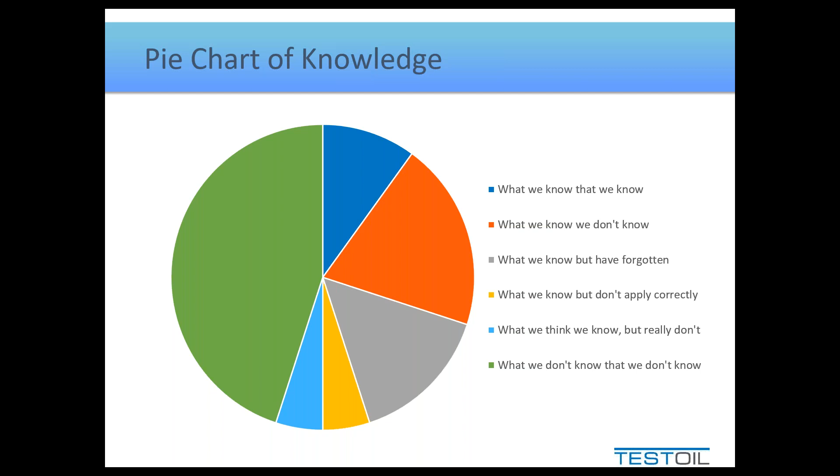So what I thought we'd start with is a little bit about why we use lubricants, then go through a couple of key definitions so we're all on the same page. Then we'll talk about oil films and the Stribeck curve. This is going to become important to us towards the end of the webinar.

And I will present the case study - this overheated gearbox is what we're going to talk about. What we'll then discuss is how we could diagnose at least some of what's going on with the gearbox without any tools - how do we do it without even using oil analysis or vibration or anything like that?

I'll try to wrap up everything people need to know to help read this report. We'll review some common degradation mechanisms, just so we're all on the same page there as well. What I'll then do is describe the tips I have for how to read a report.

And it's a bit unconventional - it's not, like I said, the usual way people typically read reports. And then we'll go through the actual report. So once we do that, you'll see basically a couple things.

One is the unusual way to read reports that's very efficient and helps you get all the information out of it. But two, you will be able to see this common problem of overheating and how even oil analysis can help guide you as to where you should probably focus your efforts.

Once we've done all that, we'll come to some sort of final decision about how we go about repairing or remedying the situation.

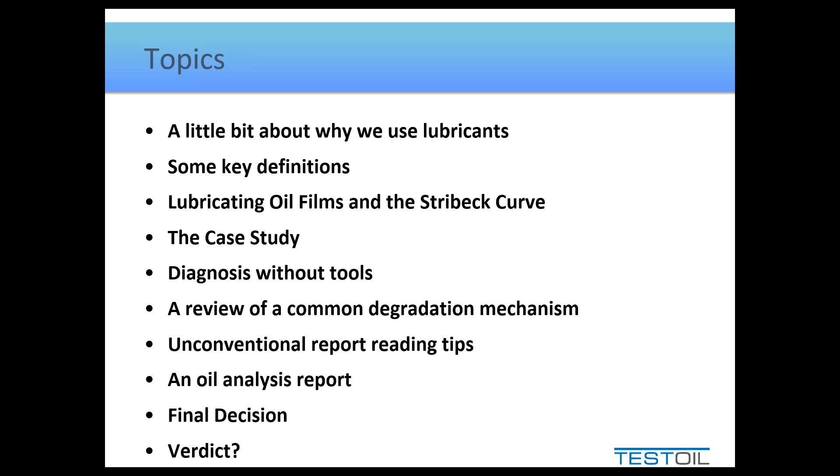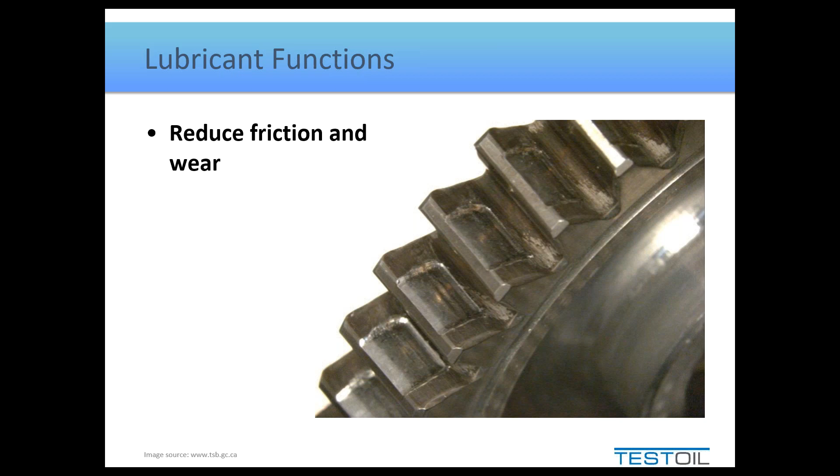So with that, let's start off with a little bit about why we use lubricants. If you ask somebody, why do you use a lubricant, the number one answer you're probably going to get is something along the lines of it reduces friction and wear. That's a great summary statement, but quick definition: what is friction? The shortest possible definition I can give you is that it's a resisting force. Some form of resistance counts as a type of friction.

The point, though, is that friction is not always a bad thing. Anybody who happened to drive today, which I know many of us are staying at home, but if you drove, there would be at least two times you needed friction. One would be the traction to get going in the first place, and the other, of course, would be braking to come to a stop.

That's because just like we need traction to get a vehicle going, and braking to make it come to a stop, with the edges of a ski we are providing a form of friction that gives us control. And that's something I always like to emphasize - we either design in or leave in by design some friction to any lubricated asset. It's because that provides us with control. We don't want things to be absolutely frictionless and move in a way that we maybe can't predict or beyond what we would ask of it.

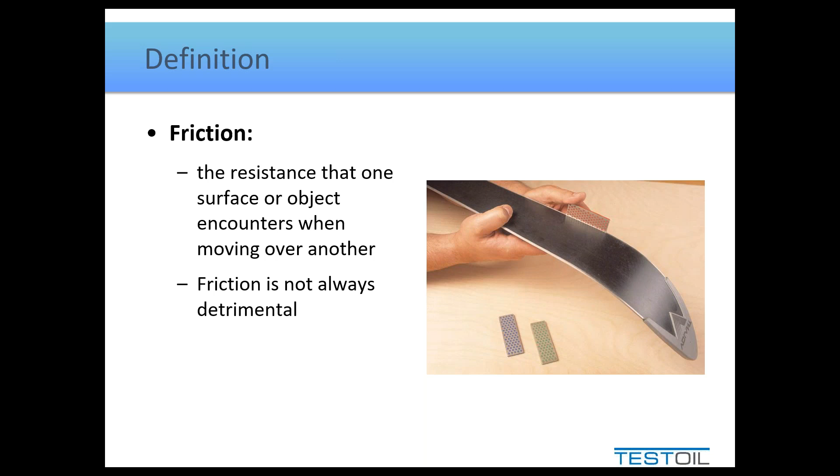Now, when you define friction, often in a textbook, it says there's two types of friction, static and kinetic. Static friction is the friction you must overcome for an object at rest, whereas kinetic friction is the friction we're overcoming while the object is in motion.

In kinetic friction, though, there are three subcategories. Sliding is for anything with a sliding contact, and the best example of that is usually something like a Babbitt bearing, because the shaft turning in the bearing is under constant sliding motion. You can also think of things that reciprocate or oscillate, like perhaps pistons or valves, but a journal bearing is a pretty good example of sliding friction.

Rolling friction is something that would occur just like tires on pavement, but would most often be seen from a lubricated aspect in, of course, rolling element bearings. Most people can picture or think of sliding and rolling friction.

It's the third one I want to emphasize to you: it's fluid friction. As soon as you hear the word fluid, don't think of the word liquid. Just because we say fluid, we don't necessarily mean liquid. What this is, is a resistance to the medium surrounding the moving parts. And if you think about this logically for a second and ask yourself, why don't you fill a gearbox all the way to the top with oil?

Well, if you've ever seen an overfilled gearbox, you would know that usually creates a lot of frothing, and there's generally some issues with the gearbox. But the number one thing is that you've increased the friction. The gearbox will find it harder to spin the gears through oil than through air, because that oil is a form of fluid friction. And that creates heat, and heat creates problems. So we don't want that.

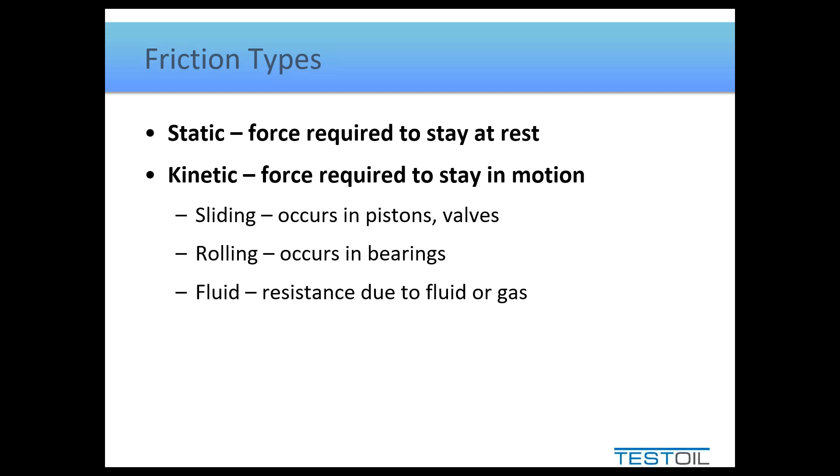Now, to change gears just a little bit here, we need to go into oil films briefly. When we describe an oil film, it's designated as lambda, the Greek letter that represents the specific film thickness. We'll just call it lambda for short. That's the ratio between the mean film thickness and the surface roughness.

Now, for those of you who are a little bit curious, surface roughness is measured not by the mean or the average between peaks and valleys of a rough surface, but by something called the root mean square. So it's the sum of the squares. It's basically an area calculation. It's fun and complicated for those of us who like math.

The mean film thickness is the distance from the surface roughness of one surface to the surface roughness of the other. So think of it simply as this: if lambda calculates to be 1, it means the fluid film thickness is the same as the roughness of the parts, so the peaks of either surface could potentially contact each other. If lambda is greater than 1, there's more fluid film separation than roughness, meaning the parts probably don't touch. And if lambda is less than 1, it means the parts were in constant contact.

So I'm going to use this term lambda and go through just 3 of the main fluid films, just so we're all on the same page, and we all have enough information to know what we're looking at when we read the report.

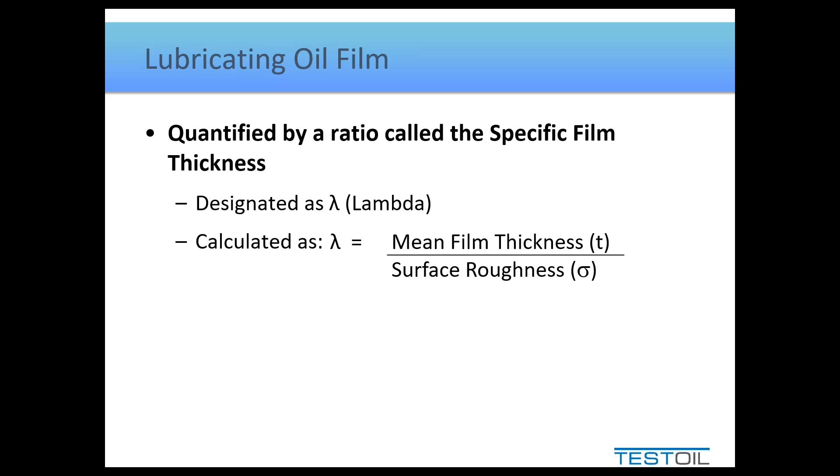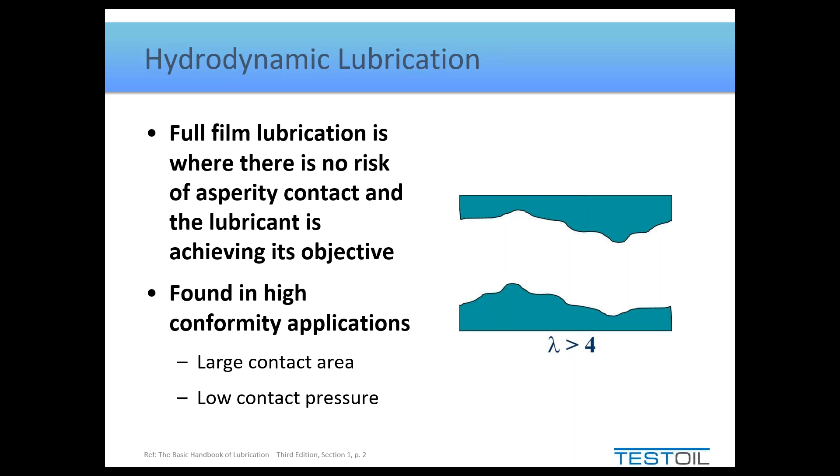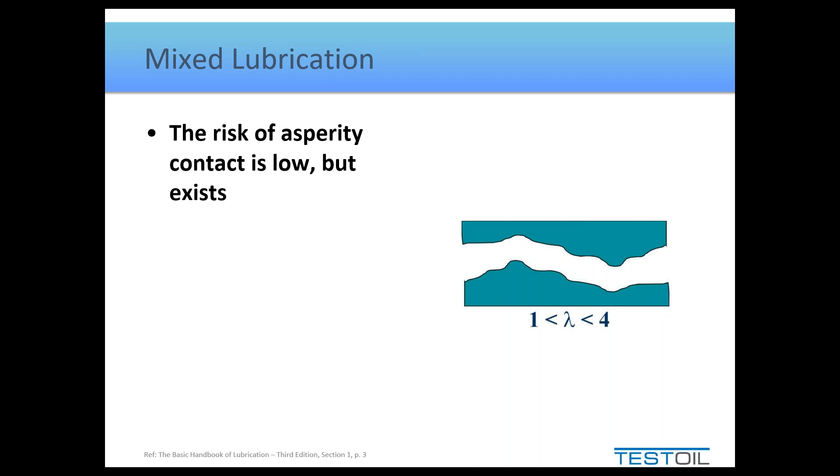On the other hand, if lambda is less than 4, all the way down to but not below 1, we call this mixed lubrication. And mixed lubrication is not a good place to be, that means there's potentially some contact. The last place we want to see is what we call boundary lubrication, which are fluid films less than 1. Less than 1 lambda means you probably have metal-to-metal contact at all times. So this is seen during start and stop, but you do not want this under operation.

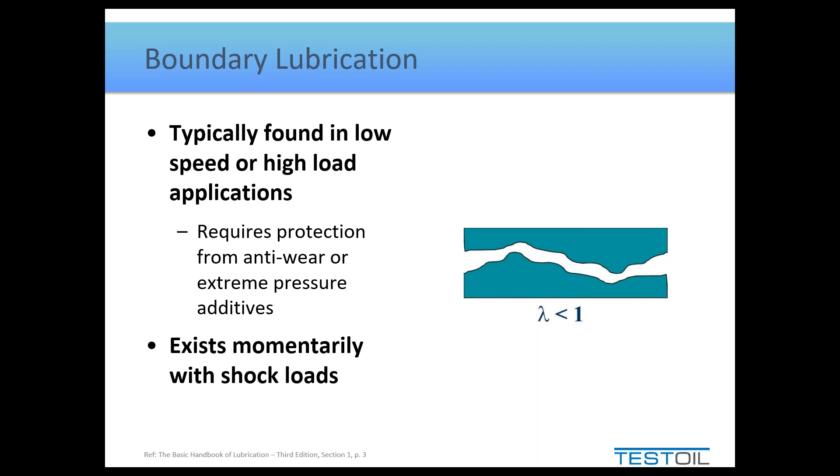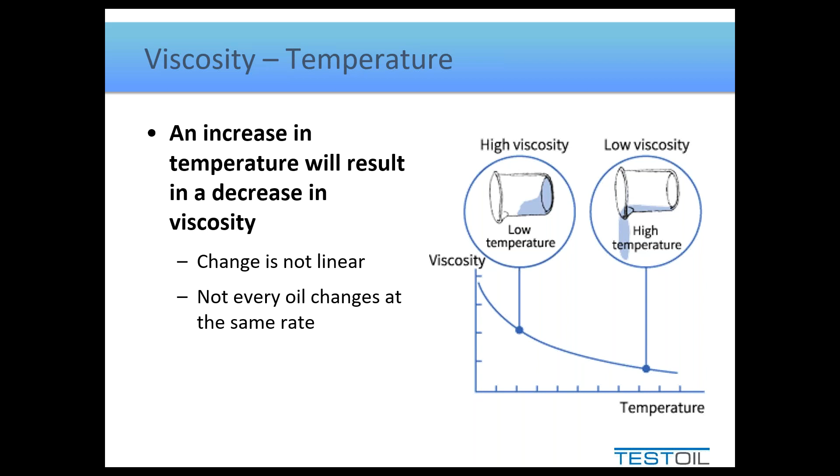That's our first clue. So this is the easy answer. We know it's running hot. What do we look for next? A couple things I like to point out about looking for problems is that sometimes we focus so much on what we see that we ignore what we didn't see. And what we didn't see can sometimes be just as revealing as what we did see.

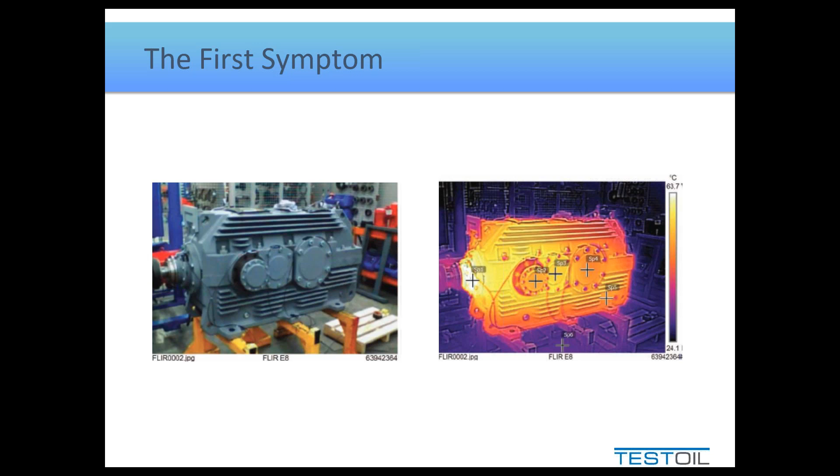And where I'm getting with this, if you want a literary example, is there's a good story from Sherlock Holmes, and it's called The Adventure of Silver Blaze. Now, Silver Blaze is the name of a racehorse. So the problem in the story is the racehorse has gone missing and the trainer has been killed.

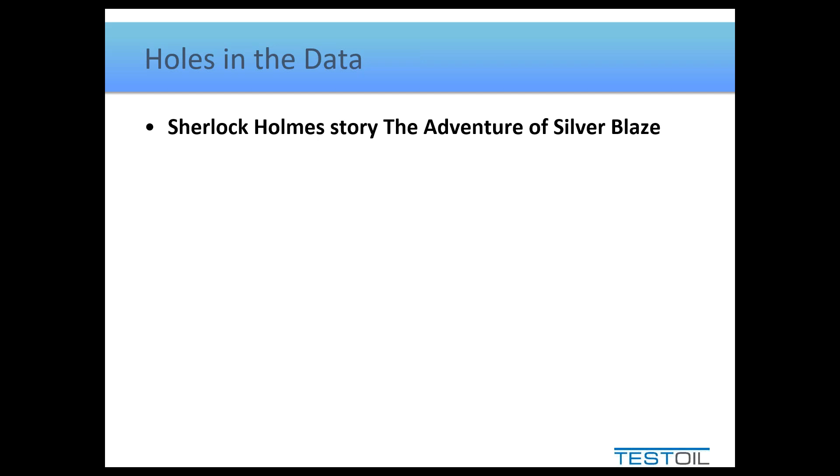So Holmes is tasked with finding this racehorse and identifying the killer. So while Holmes goes and collects his data, he makes note of a few things, and then he has a conversation with the Scotland Yard detective Gregory. And the conversation goes like this.

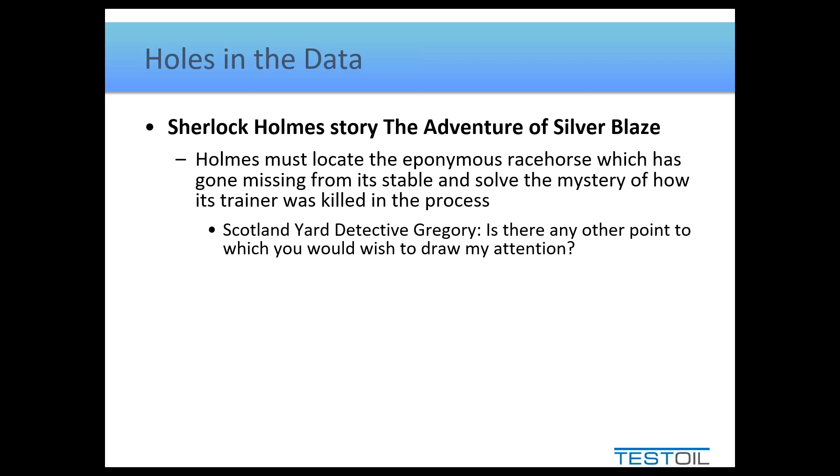He asks of Holmes, 'Is there any other point to which you wish to draw my attention?' And Holmes gives a very classic reply. There's even an entire book written on this sentence here because it's so important for us to understand it. Holmes says, 'To the curious incident of the dog in the nighttime.' Well, Gregory says the dog did nothing in the nighttime. And Holmes replies, 'That was the curious incident.'

Because Holmes's point is that when they were collecting the clues for this kidnapping, as it were, of a horse, and the murder of a trainer, all the witnesses said the dog didn't bark. So what Holmes is realizing is that there's a clue in what didn't happen. And if the dog didn't bark, then whoever stole the horse must have been known by the dog. So basically he's saying it was an inside job.

So that's the kind of interesting thing, is that he knows that it was an inside job, and really the only person who could have done it, funnily enough, was the trainer. And spoiler alert, if you haven't read the story, the trainer was killed by the horse. But the point being, what did we not see, right? We didn't find the trainer's footprint beside the horse's stall, or something that conclusively said it was the trainer. What we realized was something was missing that led us down this path.

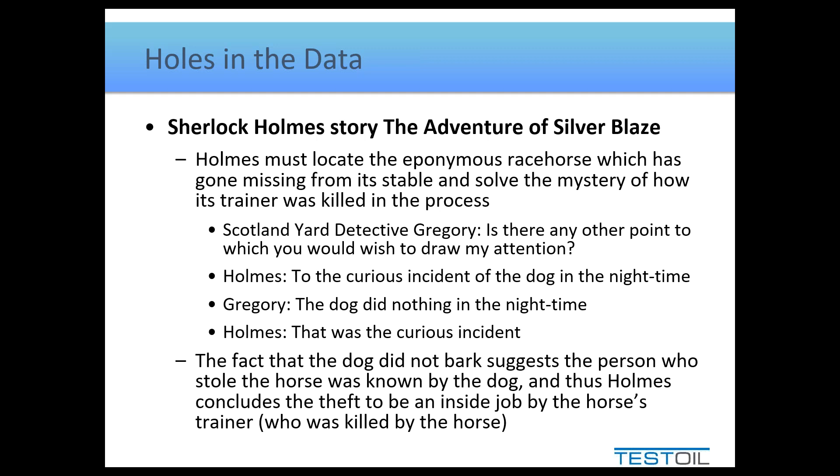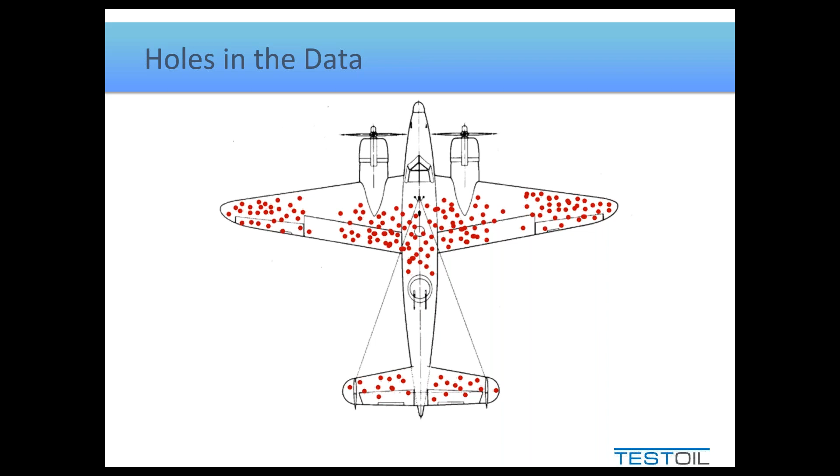So going back to our gearbox case study, we've got an overheated gearbox. We already know it's hot, we need to go figure out something else. And I said I'd show you how to do this without tools. So what we're going to use are the 5 senses. So if we walk out to a hot gearbox, what might we see?

Well, the obvious thing we're probably looking for is the oil level being too low. That would be a pretty good thing to look for. Now funnily enough, as I said at the beginning, in terms of fluid friction, it could just be that the oil level is too high. But more times than not, we're probably seeing that the oil level is just right.

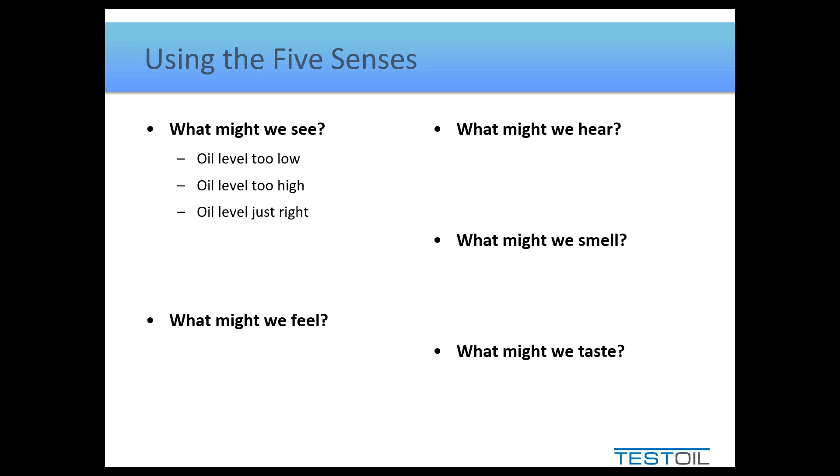What we would also see as a secondary effect to this overheated temperature is the oil has actually gotten darker. And if we're fortunate and we have one of these, we could check for debris on a magnetic plug. These would be things we could see with our eyes to diagnose what's going on with the gearbox.

On the other hand, we also have our hands. So what might we feel? Well, heat's the given, right? We already know that one. But something could be causing that heat, and one of the easiest answers would be maybe it's a misalignment, maybe it's an imbalance. So we might actually feel with our hands some form of vibration.

Now, typically coupled with this, we should hear some noise. If it's really out of alignment or really out of balance, it's probably causing metal wear, and we should at least hear some type of noise. So that's now using our ears. If the oil is really hot, then it probably is burning, and therefore it should smell burnt. So that's our 4th sense.

The 5th one, I threw this in here as a joke. No, we don't want to go down this path. Please don't be tasting oil. That's an HSE violation, so don't use all 5 senses. But these are the kind of things that we'd be looking for.

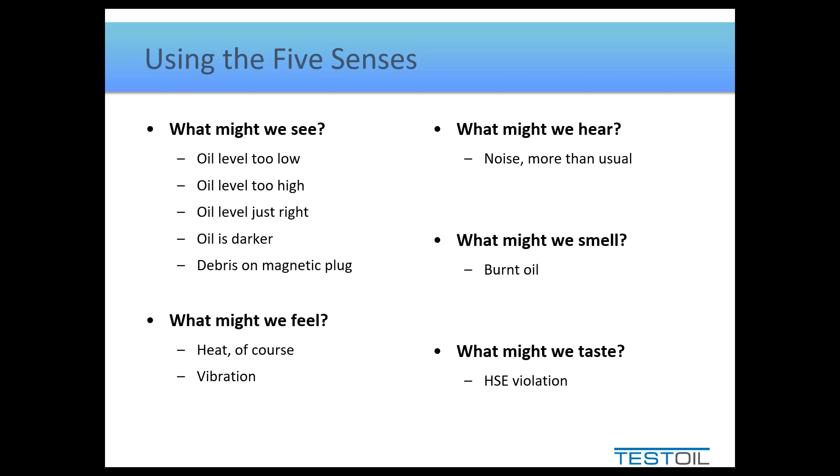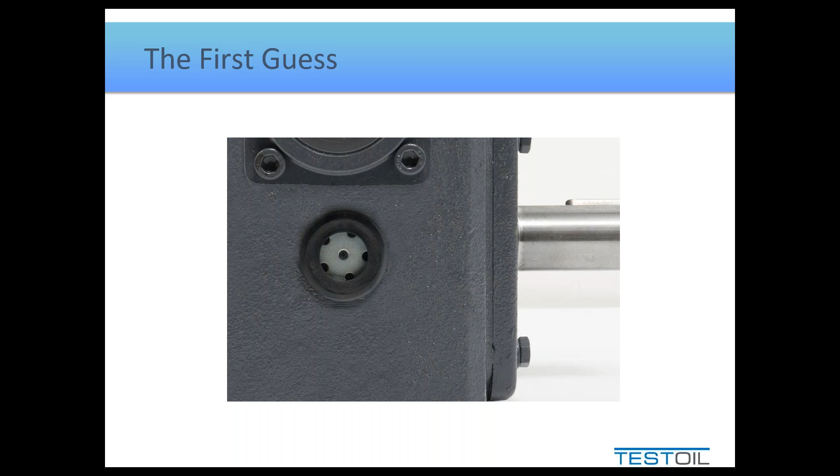Now, in our case study, this was done. And what they're expecting in the hot gearbox was to go up and see the sight glass with either a low level or, like the picture here, no oil visible in the sight glass. But as it turns out, that was not correct. That was not the issue.

Another thing they were looking for was that it should potentially be creating a lot of noise. And again, that was not what was found. This was not noisy. So we're eliminating things, and in the list of eliminations, we also thought we might feel some vibration, and we did not feel vibration either.

This is why I told you the Sherlock Holmes story and the airplane armoring story. If you go back to our Stribeck curve and say, I don't see that the level's too low, I don't feel vibration, and I don't hear any noise, those three clues are not present. So by knowing what you didn't see, you can eliminate being anywhere on the left side of the Stribeck curve, anything to the left of 4, because all of those would account for the symptoms. But since we're lacking those, we know we must be on the right side, somewhere to the right of 4.

So if we've got heat, but we're on the right side of the Stribeck curve, what does that tell us? It tells us our lambda value is probably too high. So now we need to figure out why we think that's happening.

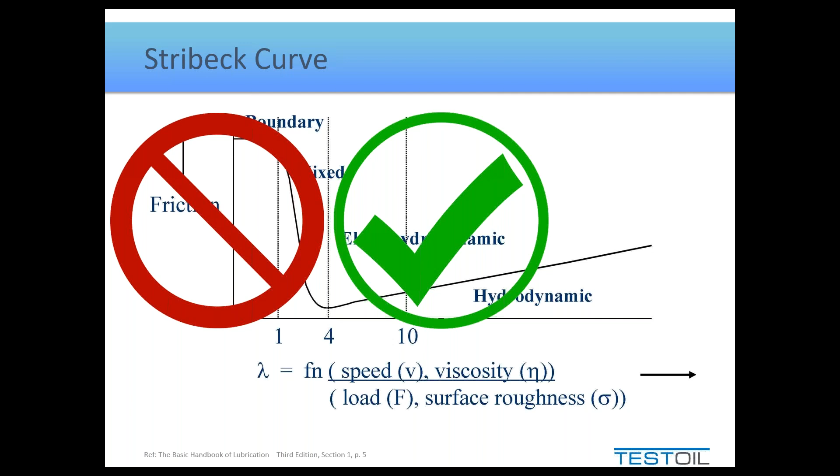As our last bit of review before I get into how to read a report and show you the report, I said I'd talk about oxidative degradation and the mechanisms behind it.

Most commonly when oil oxidizes, it's because it's come into contact with oxygen, which is fair since that's the atmosphere. What accelerates the degradation, though, is generally heat. That's the big one, but it can also be accelerated by water contamination. And certainly if there's any metal content in there, it can act as a catalyst. Other contaminants like dirt may play a minor role, and entrained air introduces more oxygen.

The outcome of degraded oil is that, number one, it's probably darker, and it can also have other things that maybe you can't see but help impart some of that color. Those are listed over there.

In quick summary, the most common things to see if the oil has actually degraded would be: visually, it would be darker in color; through analysis, the acid number has climbed; the viscosity has probably also increased a little bit; if you're measuring insolubles, those would probably increase; and your nose might detect that the oil has either gone rancid or developed a foul odor.

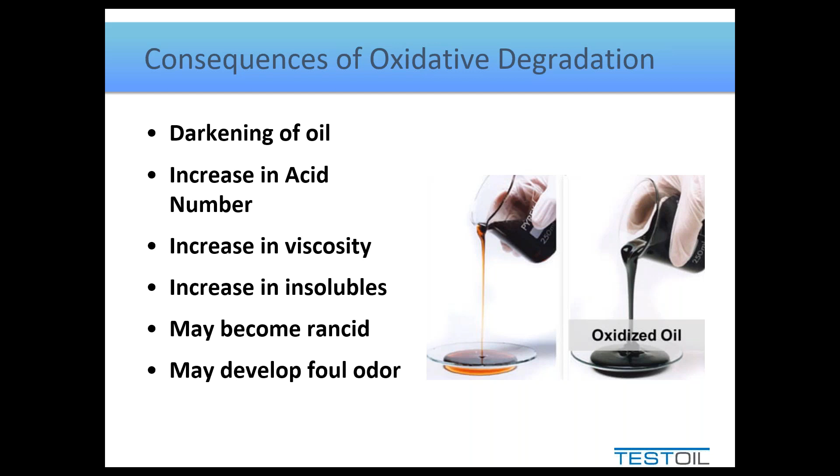When this happens, people are always looking for why it happened, and the most common cause for degradation is temperature.

If you haven't heard this before, there's a chemist named Arrhenius, who discovered that every reaction in nature—not unique to lubricants, it's everything—doubles with every 10 degrees Celsius, 18 degrees Fahrenheit rise in temperature. Meaning if you take a bulk oil temperature from something like 70 degrees Celsius, 160 degrees Fahrenheit, and increase it to 80 degrees Celsius or 180 degrees Fahrenheit, the rate of reaction has now doubled.

So it is producing degradation byproducts at twice the rate. The acid number goes up twice as fast, viscosity changes twice as fast, so on and so forth. That's the number one cause as to why degradation occurs and occurs quickly.

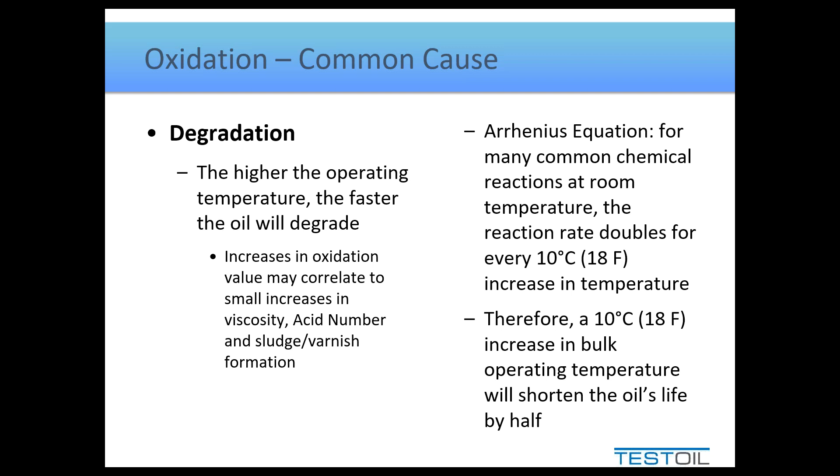Another pointer here is that when we have moderately high temperatures, you'll see your oxidation values on a report increase by themselves. But if you get to extraordinarily high temperatures—what I like to call high temperatures—you also get nitration coupled with the oxidation. That's a little tip I use to help identify the severity of a problem.

I expect oxidation, and I know oxidation will be driven higher the higher the bulk operating temperature is. But if I can get nitration to occur simultaneously in a non-combustion application, that's very worrisome to me because it means I've reached some extraordinarily high temperatures. There's definitely a hot spot somewhere in the system when you see nitration.

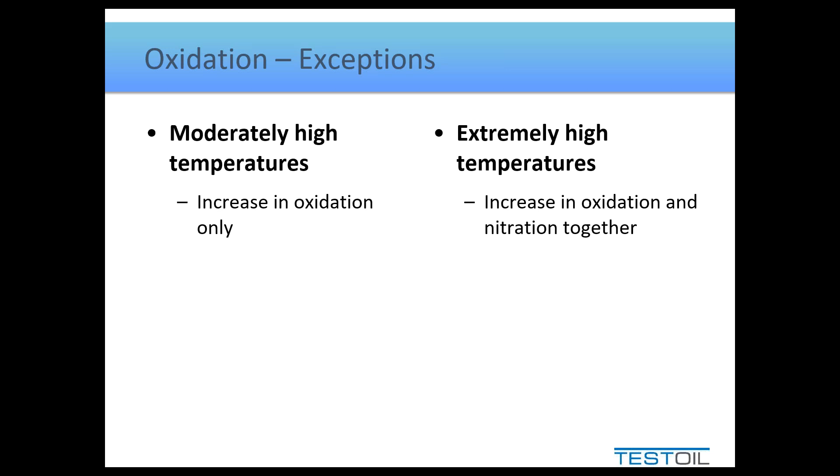One of the pitfalls when it comes to interpreting oxidation is not everyone knows what it looks like. There's a key thing about the visual nature of oxidation: it's typically very, very dark, dark brown to black in color. But it's also gritty and granular, because it forms crystalline and abrasive particles. This is key to understanding what we're going to see.

Now that we've gone through all that, let's take a look at the steps it takes to read a report. The first step is an easy step.

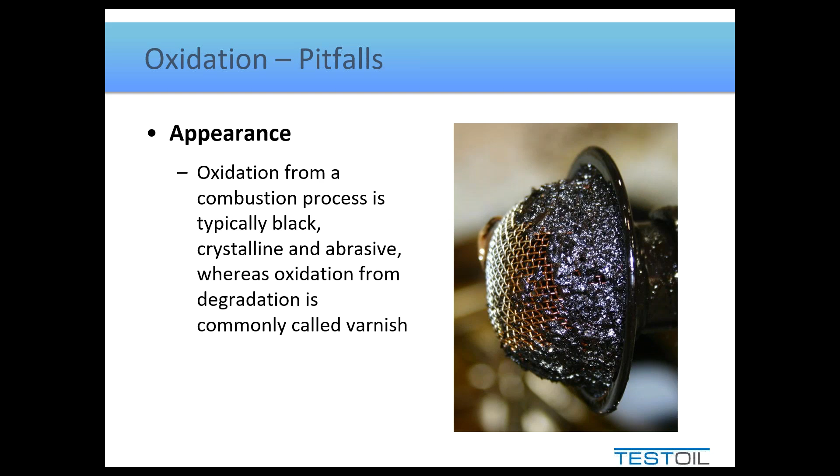When you read a report, read the whole report, top to bottom. Be methodical, don't skip around, don't go to the highlighted values only, don't just read the comments. Start at the very top and read your whole way down the report. You're gonna learn things as you read the report, guidance as to maybe what correlates or doesn't correlate with some of the other data.

Once you get to the actual numerical data, here's what we're going to do. We're going to decide if we think the value is abnormal, if it seems amiss in any way, off trend, too high, too low, not what we expect based on new oil, whatever it might be. As we decide it's abnormal, we must classify it as either a cause or an effect. We don't have to decide what causes have which effects or which effect was driven by which cause, just assign it a cause or effect.

Did this occur because of something else? Is it the primary reason something's going wrong? Once we do this, we should be able to group all the causes together in one or maybe two groups. Everything else will just be an effect and we don't have to worry about those. We focus on the causes and we can then decide on the next course of action, something that should help us fix the true root cause of the problem.

And that's why I say changing the fluid is not really the best idea. Changing the fluid makes the next oil analysis report look great, but doesn't necessarily fix anything mechanical. Very seldom is it the fluid's fault something's gone wrong. I mean, there are times where, yes, maybe it's too contaminated or whatever to continue using, but changing the oil doesn't prevent further contamination.

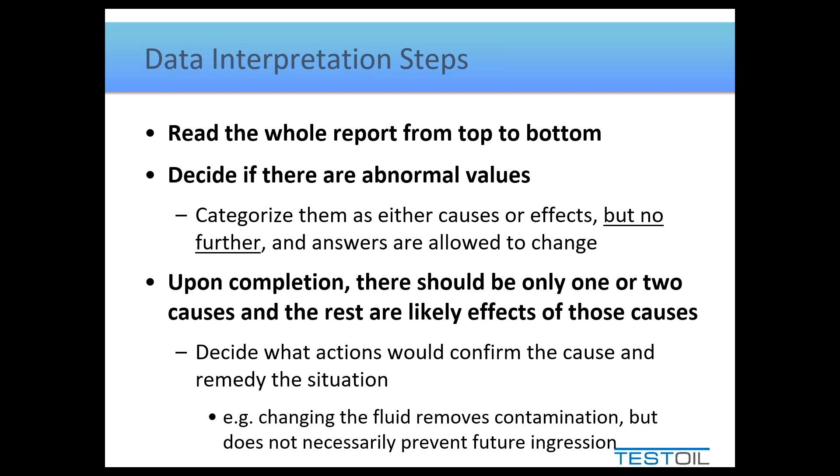So with that, we will get into the actual report now. For those of you not familiar with a TestOil report, before we get too far into this in terms of reading it methodically, let me just point out a couple of formatting things here.

Once we get down to the numerical data, I will be referring to the columns here. The first column is the new oil column, as you can see identified at the top there. That is data from a sample of virgin unused oil submitted by the end user to the lab. This is not populated by information from refineries or anything like that, it's actual samples of the oil taken right from drums, totes, however people get their oil, and submitted as a comparison. The next column over is the most current result.

As you move further and further to the right, the results get older and older. So when you're looking for trends, you read from the right to the left. When you're reading the report, you're focusing on the furthest left result, and to the left of that the comparison to the new oil, basically the best case scenario of what that oil might look like. When we get to the data section, it'll be this column here that I'm focusing on, but I'll refer to the columns to the right and to the left to help us understand if we think the data seems abnormal or not.

But anyways, getting to the report and actually reading one methodically, I said read the whole report, start from the top, work your way to the bottom. So here we go. I'll bring up my pointer just so you see where I'm looking and you can tell why I'm saying what I'm saying. But we're going to start here at the very top.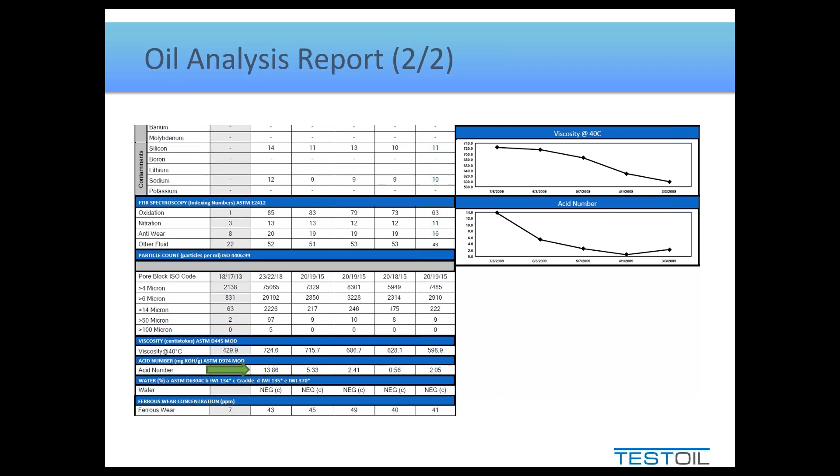As you finish off the report, though, you'll see that water has never really shown up, and ferrous wear has been a flat trend. So there is nothing else on this report that we can look at and determine if it's abnormal or not—this is all the data. So the final tally is this: we have oxidation, particle count, viscosity, and acid number, all deemed abnormal, all classified as effects. We actually, in this particular case, did not find a single cause on the report.

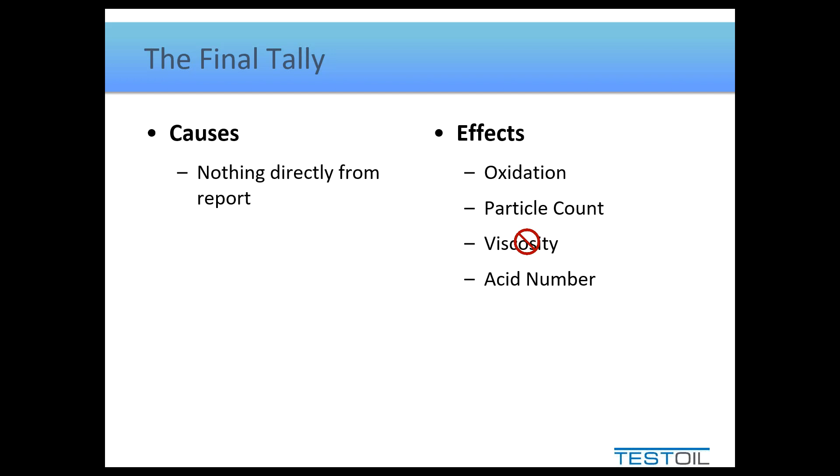But if you think about those 4 effects, which we don't need to worry about—we're not going to concentrate on the effects—what do they all have in common? What would they all have as a driving force? Heat. So heat is causing all those effects.

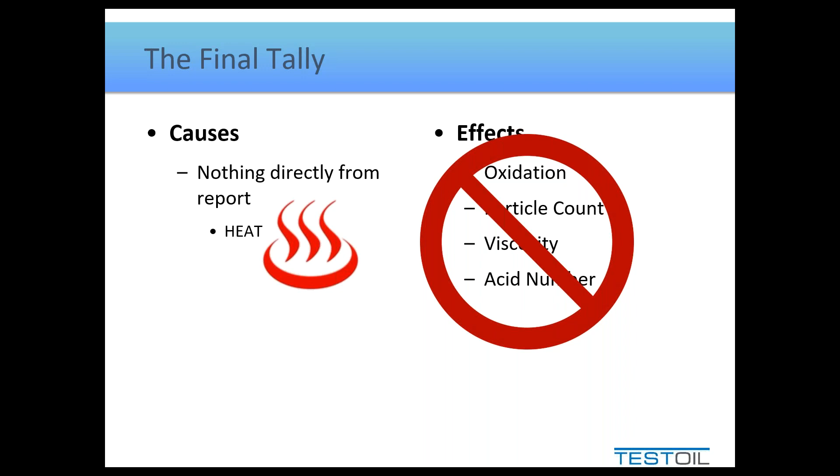And just as a quick reminder here, we have the Stribeck curve, right? And the Stribeck curve says that you will get high friction if your lambda value is significantly lower than 4. But we determined that was not likely to be the case because we didn't have the evidence that would suggest to us we should expect low lambda values. We didn't have a low oil level, we didn't have the vibration, we didn't have the noise. Where are we on the Stribeck curve, though? Well, the only other place that has high friction is way over to the right.

So how do we fix this? If we think that we've got too much of a fluid film driving our heat, how do we reduce it? We want to make sure that we move back to the left here and closer towards that lambda value of 4. Well, the only things that we have to look at is we could try changing the speed, we could try changing the load, we could maybe look at changing the surface roughness, but of course surface roughness would be near impossible to change in an operating piece of equipment. We'd have to replace parts or send it up for machining. Speed and load are governed by the process that it's connected to, so to alter those usually has cascading effects that take great consideration to modify.

The simplest thing that we can focus on that we have the ability to change is the viscosity. And this is a very common driver, and this is a reasonably common enough problem that I see, is that somebody will walk me out through a plant when I'm touring things around, point to something like a gearbox or a pump and say, this is running hot and we don't know why. And I don't even need to see the report, and I can make a pretty solid guess as to what's going on here. And it's exactly what this has all been leading up to.

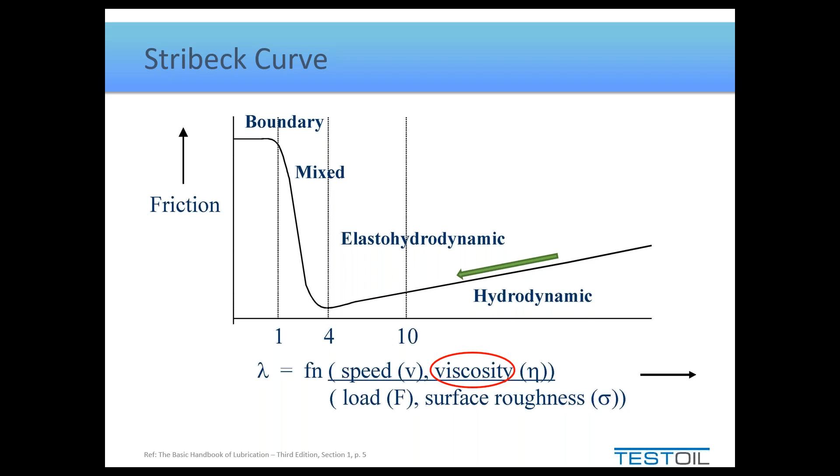So here's my hypothetical for all you listening in on the webinar. If these were the only two oils you had to choose from, which one would you choose? You visit the lube room, they have a 220 gear oil and a 320 gear oil. You're not sure which one they're currently using in the gearbox, because maybe you've done all this without any tools, without any oil analysis report, vibration, etc. But they're telling you it's running hot, and you've looked at the oil level, looked at the noise and vibration, and come to the conclusion none of that seems to be the driver.

I'm wagering we just have the wrong viscosity. Well, of course, intuitively, most of us would look at these two choices and stick with the one on the left. We would pick the 220. And this is why I brought up the point that I did, and this is the point I'll leave us on as we conclude here.

But if you actually plot the viscosities of those two products - the 220 is the orange line, the 320 is the blue line - across a wide temperature range, at a bulk operating temperature of 70 degrees Celsius, roughly 160 degrees Fahrenheit, those two oils have nearly an identical viscosity. But we did say this was a gearbox that was running hot. So if it's running hot, where is the temperature? Well, it's further to the right than that point. So I'm looking over here in the graph.

So if you pick the 220 instead of the 320, what did you in fact do to the lambda value, and therefore to the friction, and therefore to the heat? You made it worse.

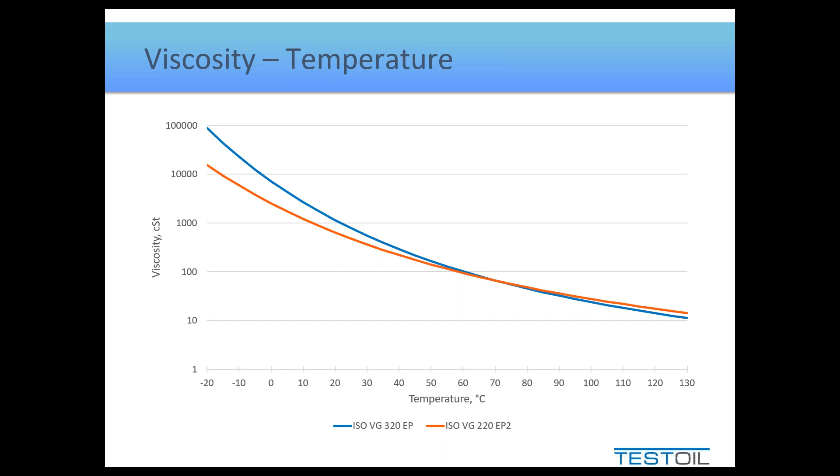So with that, I will conclude the webinar. Hopefully that's given you something to think about - it's not always what you see, sometimes it's what you don't see that can help tell you what is really going on. But also make sure we really think about some of our decisions, and say yes, I considered all sides of this particular decision, and not just blindly going in on faith or intuition. So with that, I'll turn it back over to Heather and see if we've had any questions along the way.